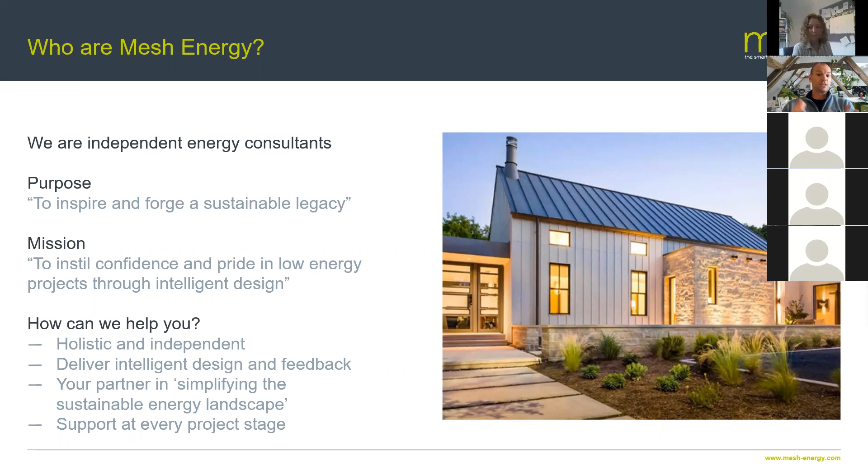So to today's webinar, this is all off the back of a whole load of work that was done by LETI, the RIBA, Whole Life Carbon Network, and a load of other bodies and volunteers. It's seriously impressive, the work that's going into furthering our understanding of embodied carbon and agreeing targets. I was only reading this morning the definition document by the Whole Life Carbon Network about the definitions of net zero, what does carbon neutrality mean? It's all laid out in a really simple set of documents.

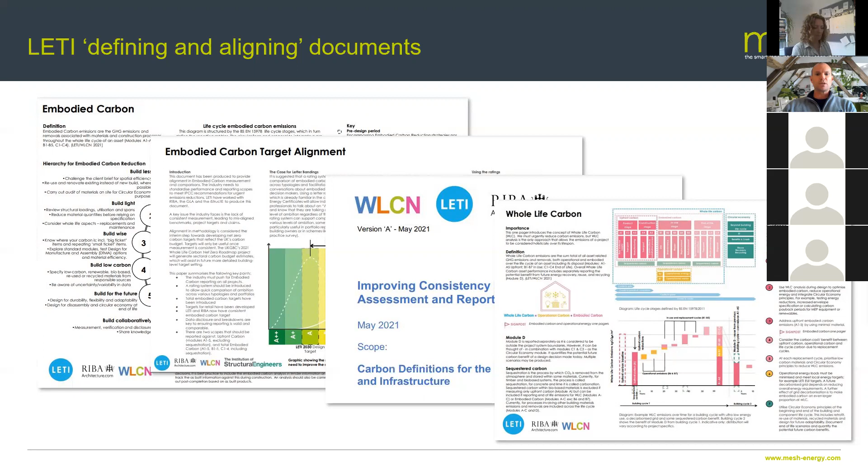And our embodied carbon calculator builds off the back of that thinking to bring a really useful tool to you guys without having to go through reams and reams of paper every day, and actually bringing this to bear on your live projects. We've got a webinar that we did a couple of weeks ago on these various targets, so I'm not going to go over all of this, but the carbon calculator builds off of that hard work. And of course, we've got the RIBA 2030 Climate Challenge, which we've talked about numerous times. Again, this has set revised targets for embodied carbon, which we're building into our calculator as well.

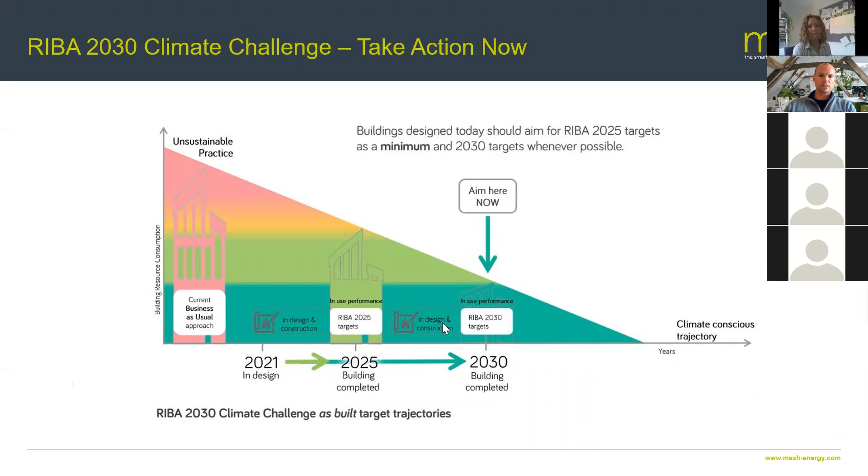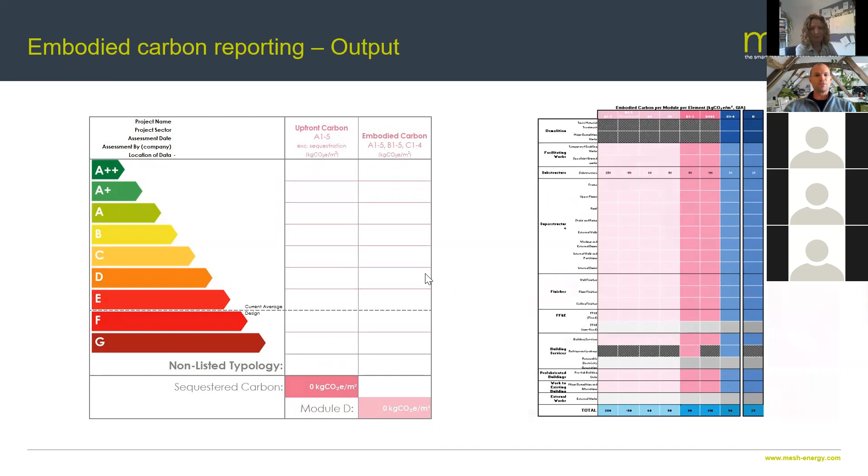So an overview of the calculator. As I say, Jenny is going to do the actual demo, but I'm just going to run through the salient points here so that Jen can focus on the actual calculator bit itself. The key features of the calculator: the main reason that we updated this was to take into consideration these outputs and these new targets. But for anybody who's used the calculator before, fundamentally, our calculator is based upon building up the layers and the elements within key external element features like the roof, the walls, the floors, putting in windows and doors and things, a bit like you would construct a house.

And the main reason that we do that is not only do you get almost an instantaneous idea of U values for that element, but it just makes sense to us, and we're using that calculator work to release another calculator very shortly to help with operational energy and various other things. So that's the way our calculator fundamentally works. You build up choosing a material, the thickness, the area over which it covers, and you build up those elements. And you put in the key building services. So you put in the fabric elements, you put in the building services. What heating system are you having? Are you having any PV, any cooling, those kinds of things.

And then any other embodied life cycle elements that you know of or you want to put in there, you can now put in there. We also added in the last variant the ability to add in your own bespoke material data. We have probably 30 different types of materials that you can put in there, but we've got a few slots where if you have a material that's not listed, you can put in your own material. And if you can dig out an EPD for that, then you can put that into the calculator as well. And as I say, the big addition here is these letter banding outputs and adjustment for the targets, and being able to report the carbon in an agreed fashion as well. And we've arranged those sheets such that when you do create that data, you can print out onto A4 pages and share that information as easily as possible.

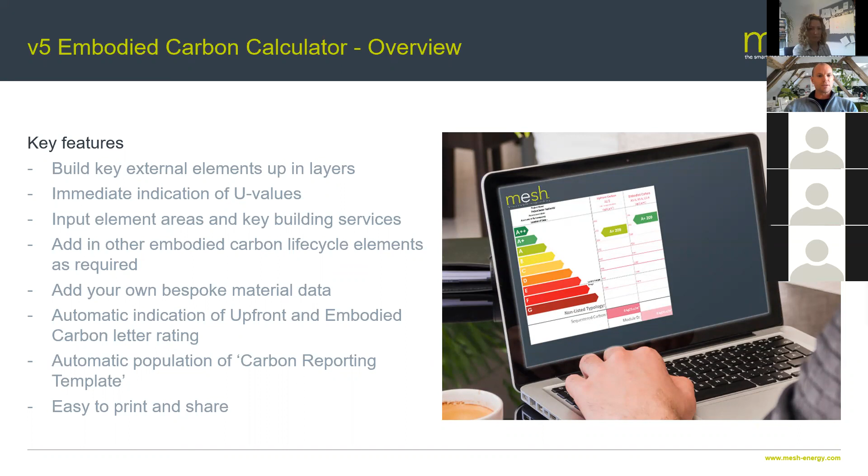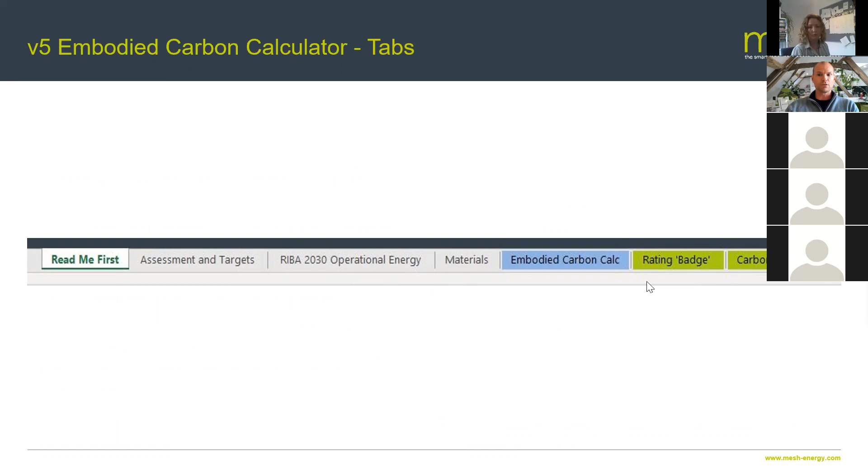So that's, in a very quick nutshell, what the calculator is about, and some of the additions. In the actual calculator you'll see this. We have a number of tabs, and we've changed a few of them. You've got a read me first tab, which is just an overview of the calculator. We've got an assessments and targets tab, which remains. We've got some hints about operational energy targets that you need to meet for the U values, i.e. the thickness of the walls and type of insulation that you need to put in. We've got a new and expanded materials tab. We then have the calculator itself, which is in blue, and the two outputs, the carbon rating and the carbon reporting, are in green.

So in the assessments and targets tab, you'll see this. It's similar to the one that we had before. What we've actually done is just reiterated exactly what we're capturing here.

So what makes upfront carbon, which is the LETI targets, and what incorporates embodied carbon, which is what the RIBA targets hang off, and just reinforces the RICS life cycle stages for materials. I guess the notable difference here is previously, whilst we were using LETI information for stages A1 to A3, which is the product stage. It's the mining of the raw materials and transport and processing, and then extrapolating for these other life cycle stages.

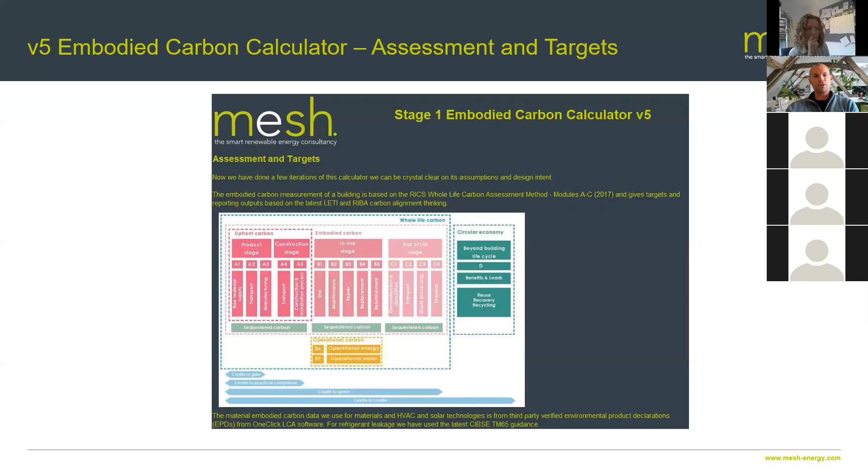We've now dug into One Click LCA and given you all the data. So we're not making any assumptions or extrapolations. We're actually giving you the data through the product stage, construction stage, in use stages where possible, and end of life cycle stages that actually come from reliable, verified EPDs to try and refine the information that we're giving you there.

The next one is the RIBA 2030 operational energy guidance. The point of this tab is because whilst we're trying to reduce embodied carbon, as our building efficiency and operational targets get tighter, you can't just look at these things in isolation. We need to be aware of the improved U values that we need to get to, say if you were going for a RIBA 2030 target, and you need to make sure you're putting enough material in the building to hit those nominal U values so that you're not light. You think your embodied carbon's fine, and then when you actually come to figure out what U values you need, you find you've got to add a load more material to the walls to get the right U values.

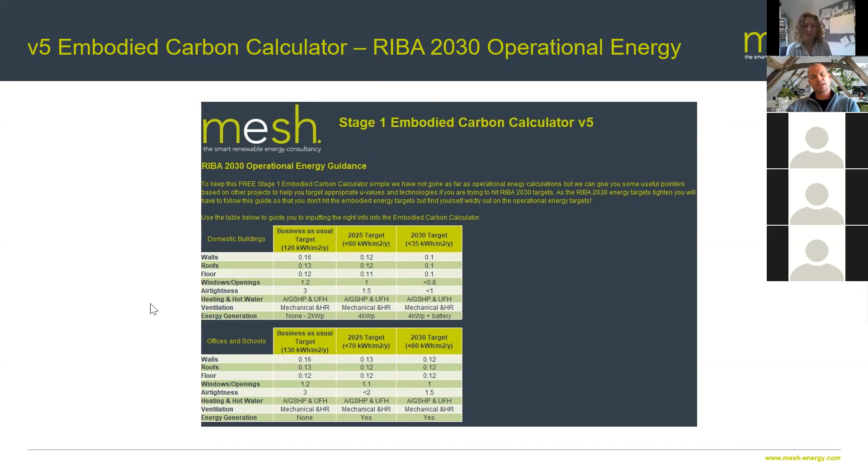So we've broken this out into domestic buildings and offices and schools, which generally speaking have different operational energy targets, and fractionally different U values that go into the various elements. But also there's things like the heating and hot water systems, air tightness, ventilation, and a suggestion of energy generation levels that you're going to need as well. So there's a slight change to that particular one.

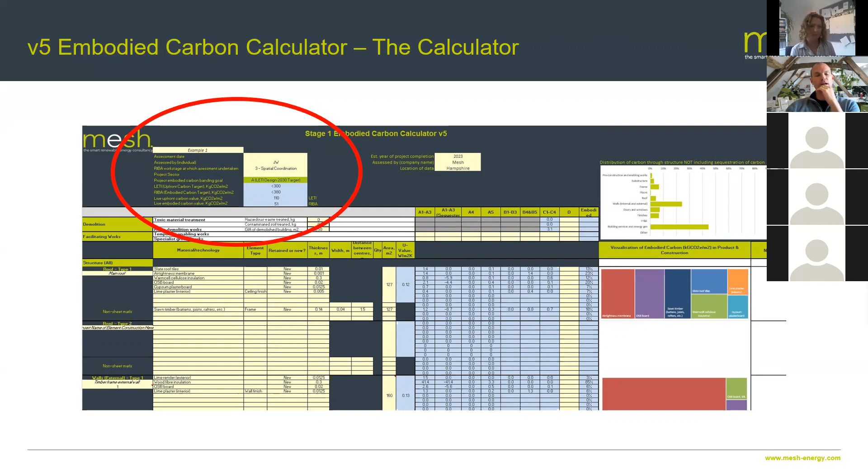This is the carbon calculator tab. This hasn't massively changed, but there are some considerable changes. You'll be familiar that up in the top left-hand corner here, you input a load of data, and Jen will run you through this. So this is your main input, the name of the project, what type of building it is. We've got who the assessment's been done by. You can set targets, and it gives you a live output of the targets and where the building's at.

This section, although I've cut the page off here, is where you're putting in your roof materials, floor materials, wall materials, windows and doors, and you scroll down there. That's nothing new. That's where you put in your layers. We've got a couple of little bits in there which Jen will run through, but nothing really changes there. The big addition is that when you pick materials, it tells you what the different embodied carbon elements are per square meter of GIA for the different life cycle stages. That information comes from our material database.

And then we have our graphical output here. So we've got the one at the top here with all the green horizontal bars. That's for the building as a whole, and that doesn't include sequestered carbon. So that's giving you an idea of the carbon for the various elements. So if you've got a lot of timber in the project, it's not taken into consideration the saved or sequestered carbon.

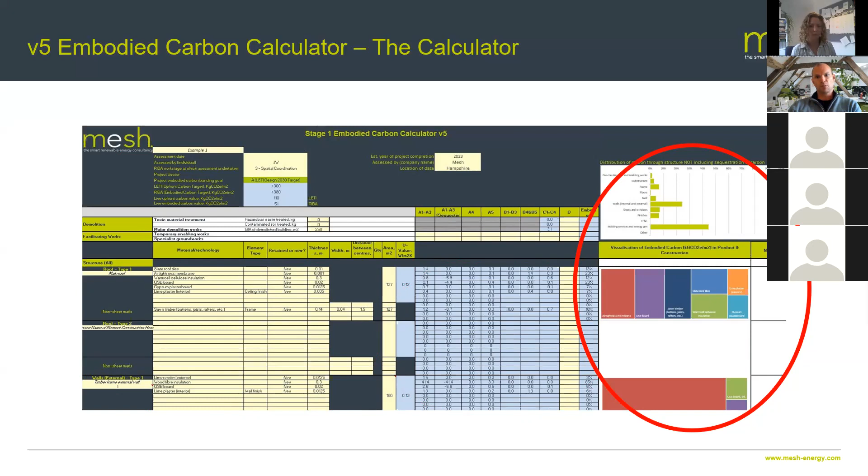And these other elements with the multicolored tree map graphs show you, for the roof or the walls or the floor, the carbon that is in there as a proportion of that element. So you can see where the big hitters are, where there's a small amount of carbon. It gives you an idea of some of the things that you might want to change if you're outside of a target, or you're trying to keep your carbon as low as possible.

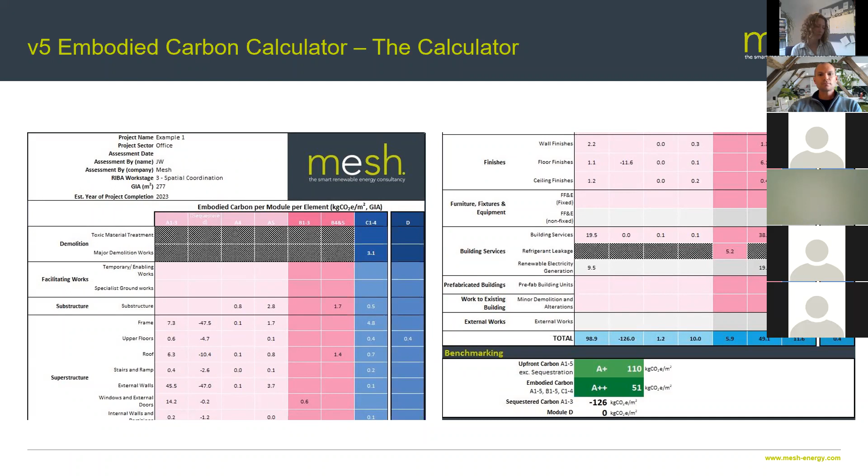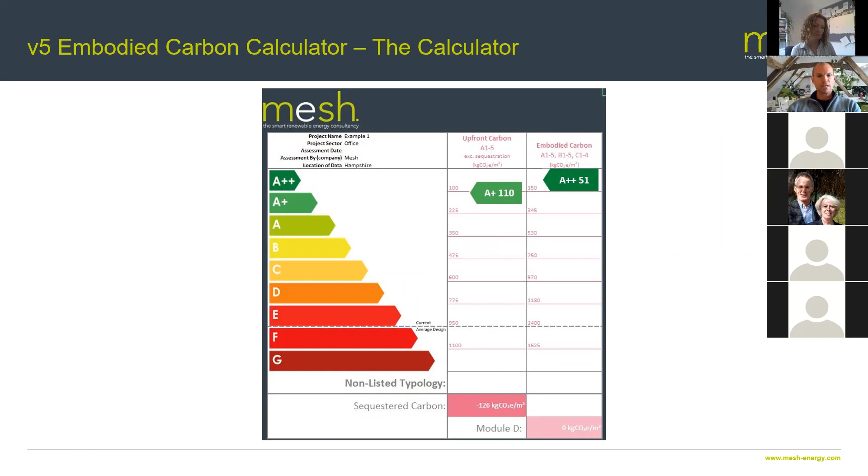And then we get onto the output pages. I've split this into two. When you fill in that data on the embodied carbon page, it automatically populates this carbon table. And then on the final page, you have the output for both upfront carbon, which doesn't include sequestration, and embodied carbon, which is for all the life cycle stages and includes sequestered carbon. So that is a real whistle-stop tour through the calculator and some of the new bits.

What I would say before I hand over to Jen here is, it's one thing coming out of this calculator, but it shouldn't be underestimated that we are keen to improve on this. We're keen to discuss it. We're keen to have you guys tell us how we can improve it, and share our results.

So as a result, we've set up a group which is the Embodied Carbon Calculator group. We want to see your questions there. We want to see your feedback there. We want to see results shared there. And hopefully this will give us a better hangout place to talk about what's good, what's bad, what's ugly, and what can be improved around the calculator. So do check that group out, join that group, and hopefully we'll see you on there shortly.

So Jen's going to do a demo for us. This final slide, I'll let Jen introduce the project that she's going to run through, and then we'll get Jen sharing her screen and off we go. So Jen, over to you. Thanks. So hi everyone. I'm going to run through a project.

This one in particular is a really great example of the embodied carbon tool because it's only at design stage 2. And while we love getting involved really early, as architects you can add an awful lot of value by having this information at your fingertips as the design develops. So just a quick intro, it's a 4-bedroom family home. The client is really keen to reduce carbon and be generally environmentally friendly. They're also keen, as a lot are, to have a certain aesthetic with stone cladding.

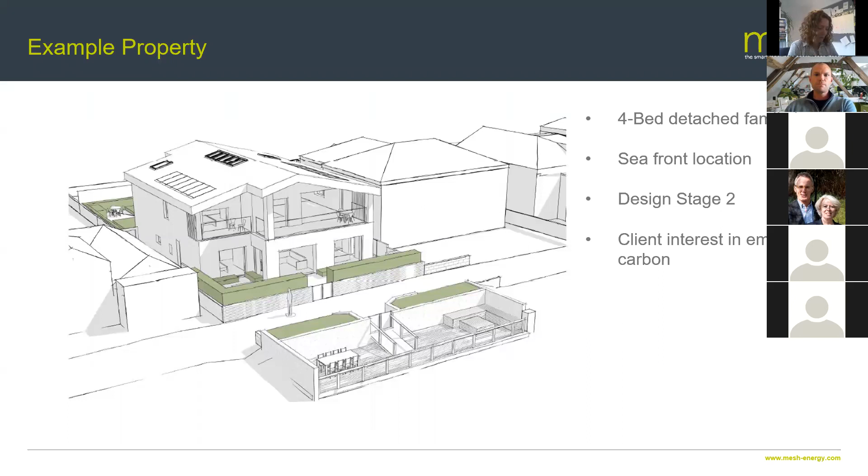And a lot of the early conversations that I've had with the architect so far have been around whether those two are mutually exclusive or not. So we're going to delve into the numbers and do a little bit of an investigation on that. So let me share my screen. You should be able to see that now, fab.

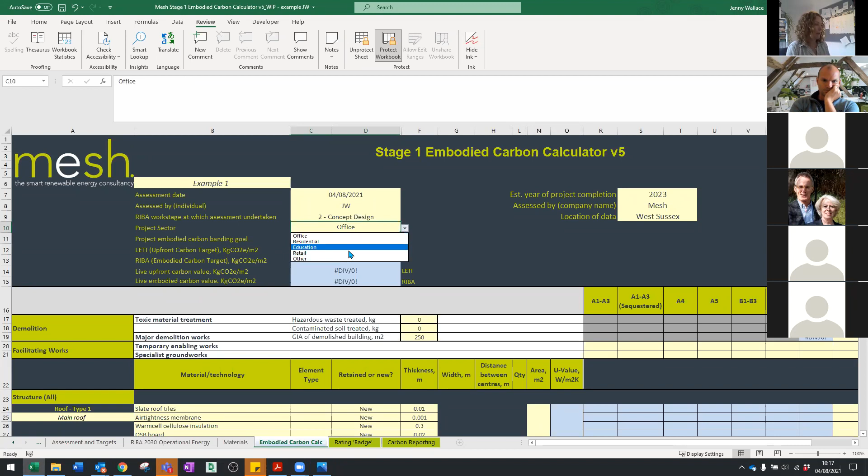It's a residential property. This first section here is all around any demolition or facilitation works that are taking place. In this particular project, we know that they're demolishing an existing building, and so I've put a figure in for that. If you know that you've got toxic material or contaminated soil to be removed, you can put that in as a kilogram metric. There are some other options in here around specialist groundworks. These will be very specific to your project, so we've left the option there to put them in against the various life stages.

So just dropping down a little bit, we've got the roof build-up as the first element. You'll notice that these are split into sheet materials and non-sheet materials. Your sheet materials are being calculated to give you your U-value, and those are everything that's across the whole span of the area, so typically your insulation, your roof tiles, and your non-sheet materials will be structural materials. As you get further along in the design, and you maybe have information from a structural engineer, you can pad this out. So this is a first pass.

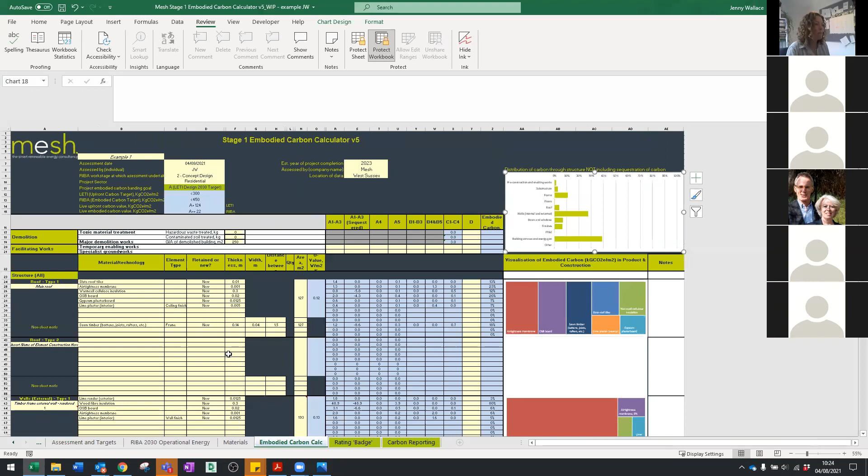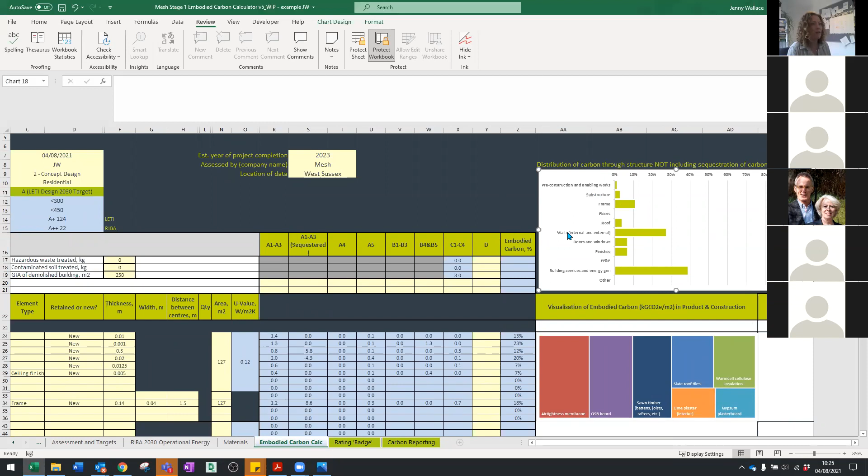So, yeah, putting in those floor areas in the yellow boxes brings the rest of it to life, because all of these columns R across to Z are all calculating the rest of the figures based on the floor area. So as soon as you put those in, everything starts to open up, and we can start to see some proportionality coming in how the different elements are splitting across the whole building.

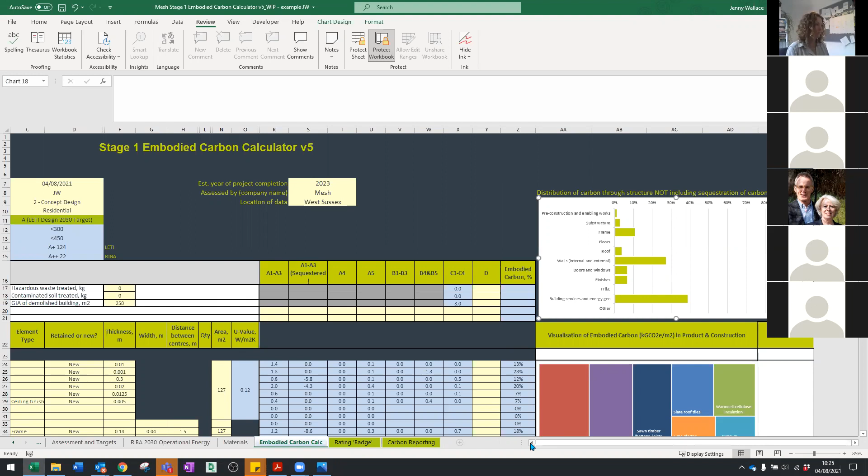So I would just say there, sorry, just to cut in, Jen, if it works for some people, it might be worth starting with those bright yellow cells, because you know what the floor areas are. And then when you start putting in data, you'll immediately get graphical data from the start, rather than investing a load of time in putting stuff in and not getting feedback. So I personally sometimes just start with those bright yellow cells, because it is so critical that information goes in and the other numbers come off the back of that. But of course, it's entirely your preference.

And a quick note there that I put in the chat box, these light yellow or bright yellow cells are the ones that you can input data into, whereas the blue are the output cells. And that's just a general thing to look for. So if it's yellow, you can chuck something in. If it's blue, you'll get an answer back out.

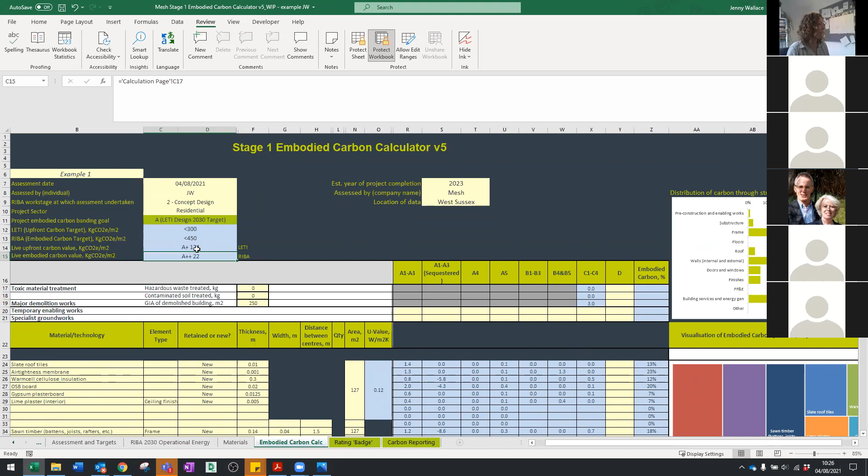And we can see now that we've put those floor areas in, we're actually getting some feedback on how the property is performing against the LETI target and the RIBA target, and it's doing quite well. So let's carry on. I'll just zoom in a little bit, save your eyes, and we'll come down.

So we put in details around the doors, around the floor areas, and so then the next details to add are, we can add details around furniture, fixtures and fittings. Now, obviously, that is going to be very, very specific to your project and the taste of your client and the spec that you're including. So we've left the cells across here as yellow so that you can include your own details there. At this stage, we haven't specified any of that, so it's a little bit too early.

What we do know is that it's likely there's going to be solar PV on the roof. We know that they're going to have a fairly small air source heat pump. They'll have a domestic hot water cylinder. They won't have cooling. Their preference is for underfloor heating. And given the air tightness targets that we're planning on, they'll need an MVHR system. So all of that's been included.

There are a few more options on the bottom, all around any works to existing buildings. So if you're having an extension, etc., or any external works, prefab works. For this building, not appropriate at this stage, but it allows you to add that detail if you have it for your project at a later point.

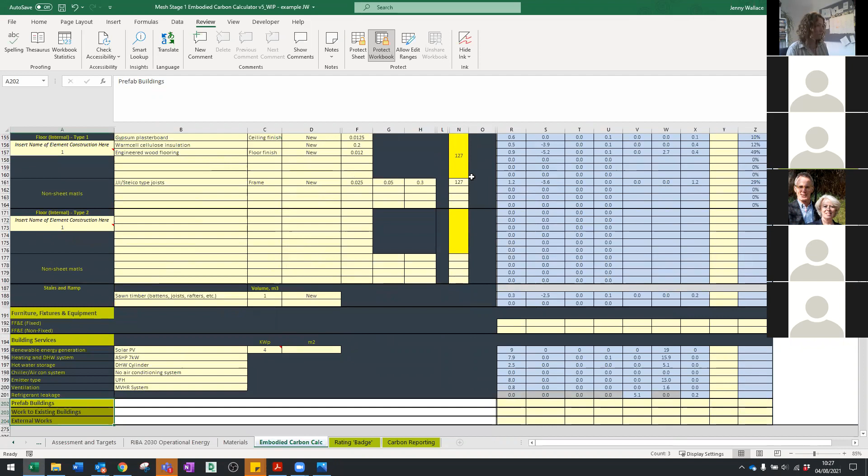So now we know. Sorry, Jen, I just spotted there, where you've got your non-sheet materials, you've missed out in column H. There's some missing data on the distance between the elements. So if you scroll up, you'll see that some of those cells are empty. I think for the walls and stuff. So there in the walls, there's no data. Oh, I see what you're saying. Okay, let's go. Well spotted, thanks. Has that changed the results? No, we're still looking good. So double check on the frame.

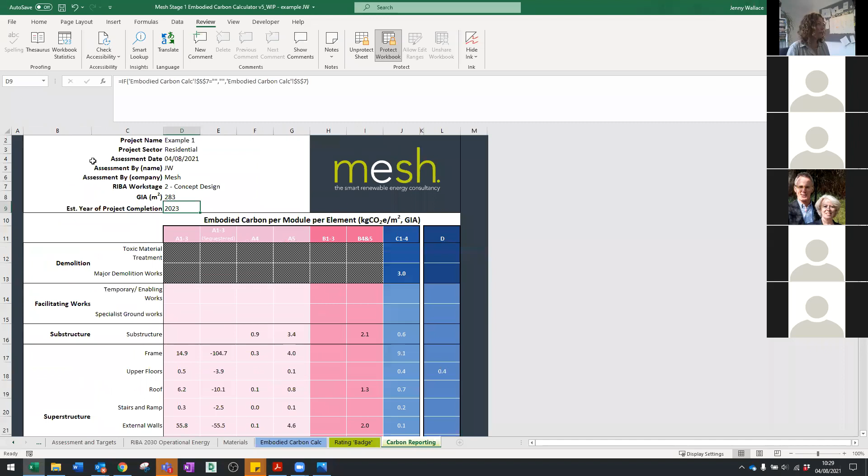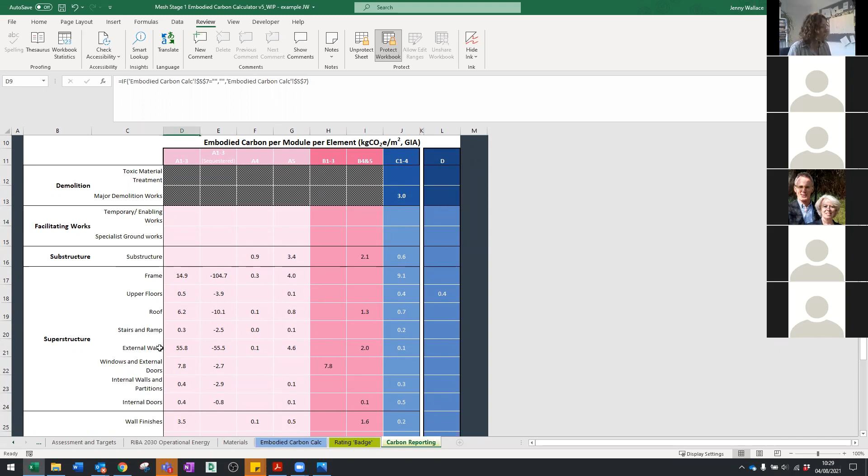So this was what I was alluding to earlier: if we want to pick out specific details around the frame or around the external walls or the finishes, you can, in these drop downs here. So that's where that data is being picked up from. It'll still work without it, but you won't get that level of granularity.

So let's have a little play then. Let's go back and see if we were to choose a stone wall or stone clad wall, would that change our results significantly? So I'll put that in there and put this to 0. So now we're saying that all of our walls are of this stone clad build up rather than the rendered build up. And we'll go back over to here. So actually it's not affecting it too badly.

Not significantly at all. Now obviously that will depend upon exactly where you're sourcing your stone from. If it's local, it'll be even better. If it's coming from further afield, it'll be worse. But it certainly doesn't give this project a poor embodied carbon score.

The other thing we could do, let's say we were using stone from a recycled source, or recycling it from the previous project, we could say that was retained, and it would remove all of the assumptions in the A1 to A5 band, and still include the end of life and replacement carbon. It just gives you that slightly better score up front.

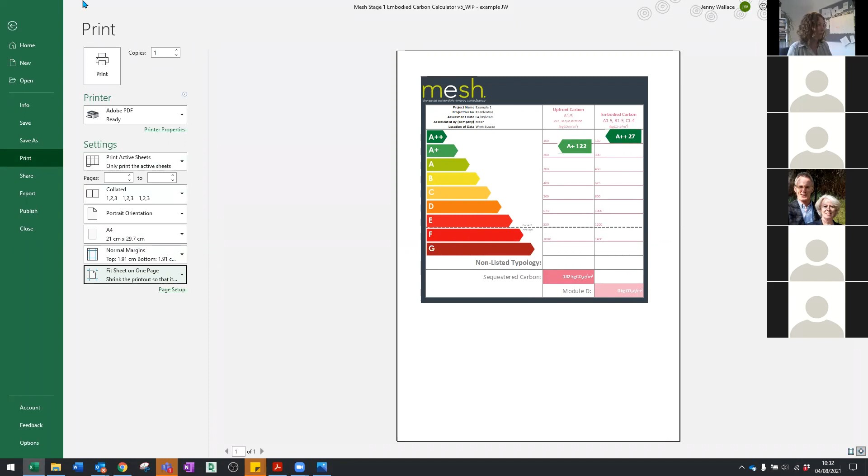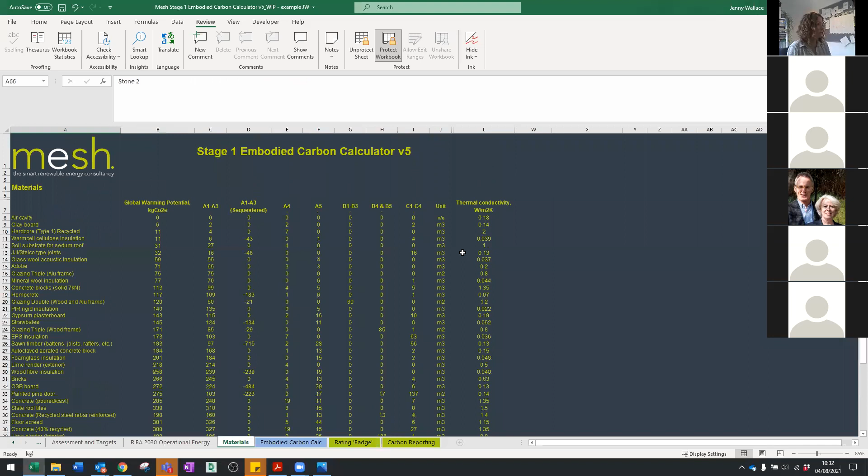One of the other things I was going to add there: Jen showed you the materials tab there with stuff that you could put in the bottom. I am aware that there's a considerable amount of people using the iStruct tool. So what you could do here is actually put in, rather than a single material, the output from the iStruct tool, which would allow you to fill in boxes A1, A2, A3, A4, B whatever, C whatever.

And so you could put in there whatever element you chose to, because the iStruct tool is pretty good, and put that in almost as a kind of a sub-assembly and select that under substructure or superstructure or whatever. And then it will factor that in. So there is a way of using the output of the iStruct tool for assemblies rather than individual materials. You've just got to call it the right thing.

So I'd like to open the floor for questions. If anyone has any questions following all that, it's a bit of a whiz through. You might want to have a little play, but if anyone's got any questions, happy to take them now. Yeah, I was just reading Zach's question, actually. Sorry, I'll turn my video back on. Zach, do you just want to explain your question there? So Zach's asking about working on extensions. That might be easier, just talking through that one. Sorry if it was unclear. No, it's fine.

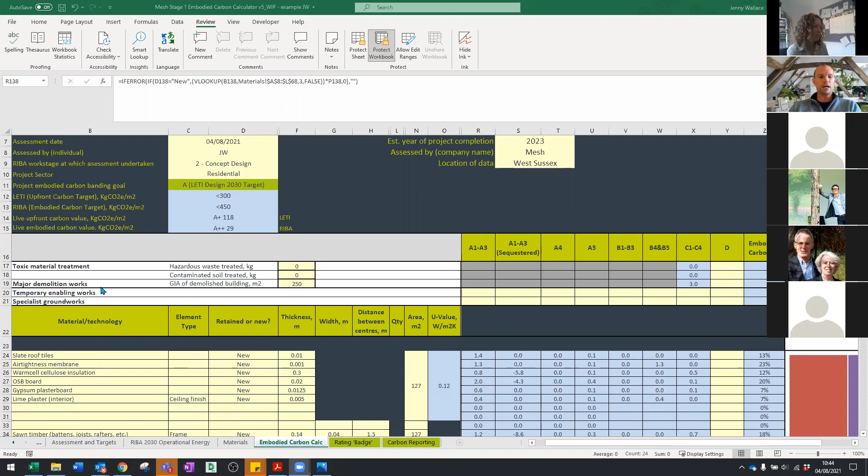You would include them down at the bottom, Jen, if you just scroll down to the bottom in the calculator. Pretty sure. Oh, it's because I'm too far away. There we go. So major demolition. Oh no, okay. I'm sure there was something in maybe work to existing buildings. It would probably go in that bucket. We're still trying to figure that out, Laura. So when we do, we'll try and add an option in there. Some of this is still a bit fluffy. Some of this can be accurately worked out. So as you know, that's why we leave these kind of open.

But as I say, like Rob was asking there about bathrooms, how the heck do we find out what needs to go in the FF&E box? Well, if we can work out a sensible way of figuring out what an ensuite has, embodied carbon-wise, in the RICS life cycle stages with a bath, a sink, a shower and various other things in it, then we'll do that. But until that point, we're just going to have to scratch around and potentially guess some numbers and make others aware that those are estimates. But there's loads of work going on in the background, so that may come sooner rather than later to allow us to populate those cells. We'll certainly let you know.